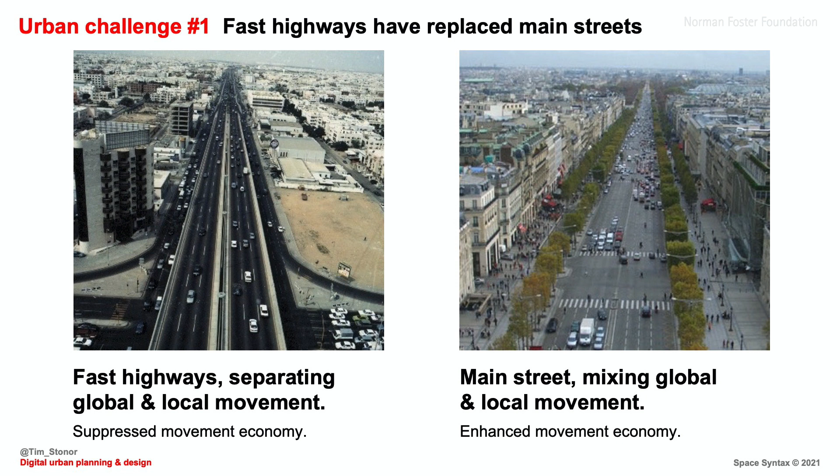Contrast the situation on the left, which is a city in the Middle East, with the city on the right, which is Paris, the Champs-Élysées, which is a main street mixing how you walk and where you drive and where you cycle. The buildings front the Champs-Élysées.

The property values are the highest on the Champs-Élysées. In the city on the left, the buildings turn their back on the highway and the property values are among the lowest in the city.

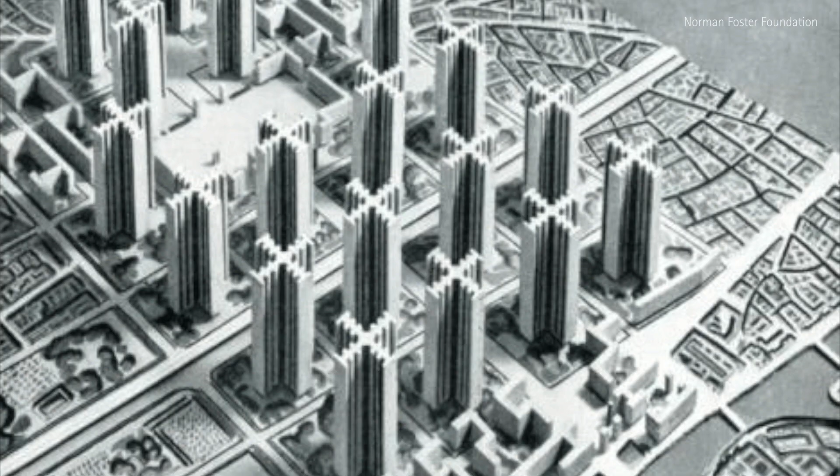Where did this come from? We can trace the origins of this approach to city design, this negative approach, to the Plan Voisin by Le Corbusier. A noble intention to make the city more efficient, but one which separated high-speed cars from slow-speed pedestrians. That plan was sponsored by the Voisin automobile company, and Le Corbusier's own example belongs in the collection at the foundation. A noble idea to use the car to create new forms of mobility, but one that was highly damaging to existing places and to the creation of new places.

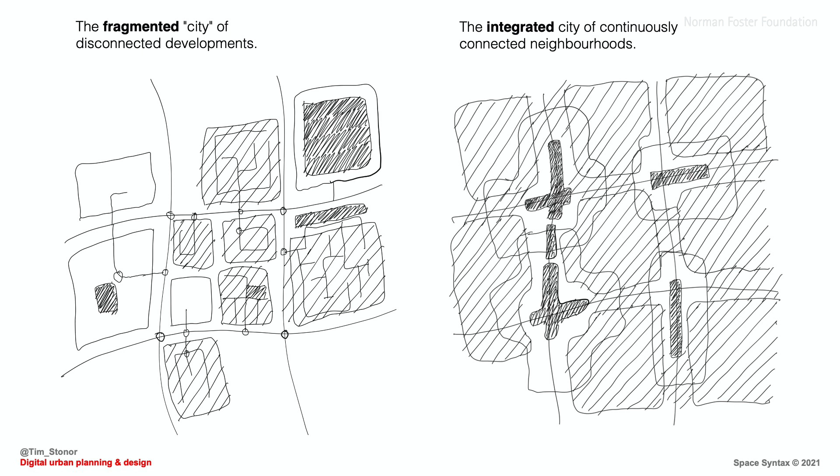So what we can see is the number one challenge: the fragmented city of disconnected developments on the left, or the integrated city of continuously connected neighborhoods on the right. Your choice. Which one would you rather build? Which one would you rather live in? Is it the city of car dependence, obesity, and loneliness, or the city of walking, cycling, and livability?

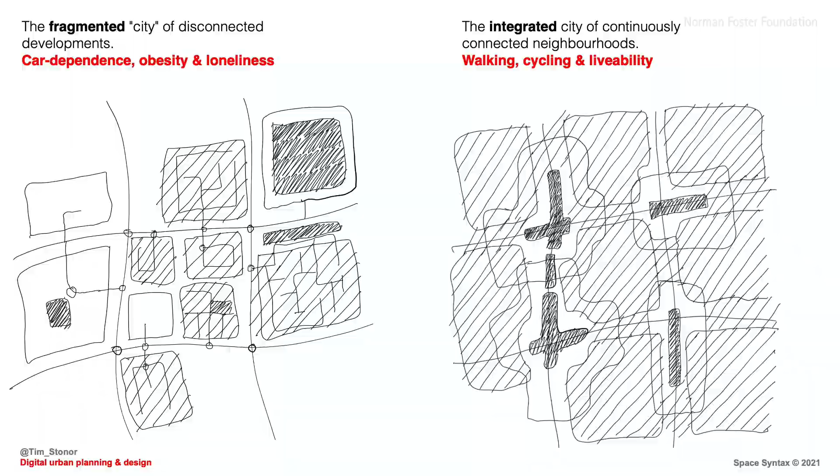Clearly, it's got to be the latter. It's got to be cities like Barcelona, cities like Madrid, cities like Paris, all of which have been built around great places for people to be.

And this isn't just about simple enjoyment. Look closer at how people behave in streets and public spaces, and there is a myriad of activities being undertaken, from simply being present, co-present with other people. Then the beginnings of communication—a wave across the street might lead to an interaction between people that might itself develop into a transaction, perhaps an economic transaction or a social transaction: the creation of a friendship, the creation of a business partnership.

Being introduced to people in public space, at a bar, at a cafe, is a very everyday thing, but put it together globally and you have a process of innovation, a process where those introductions lead to new ideas being created that had never existed before. Ideas that can then be broadcast among the community.

So look at a simple public space, and you're actually seeing what I call the transaction machine. Cities are transaction machines. We have cities for a reason: to help us understand our problems and then find the solutions to those problems. Cities are giant computers, only if we build them right. And if we want to build them right, we have to build great streets and great public spaces to create those places where people can generate those relationships and create those transactions.

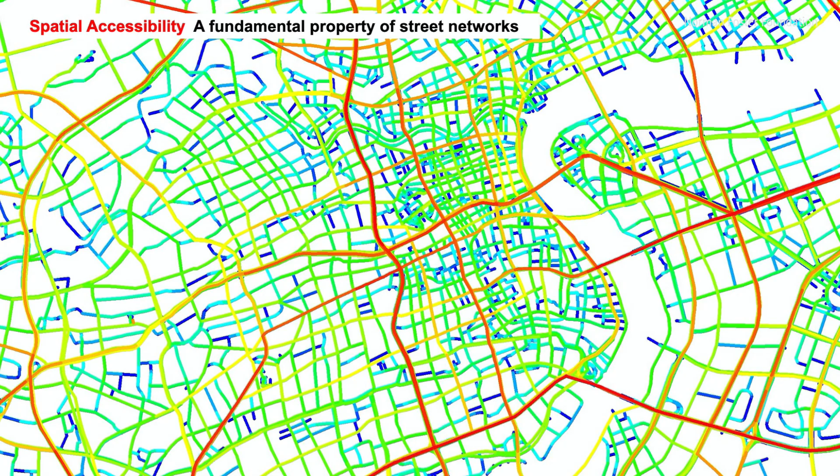We use a highly simple graphic system where the best connected streets are highlighted in red, then orange, yellow, green, through to the least well-connected streets in blue. This property of connectivity is measured by an algorithm that journeys from every street origin to every other street destination and calculates the simplest route from origin to destination, finding not only the shortest route, but the route that involves the least wiggle, the least deviation from a straight line.

We've discovered through research that those two properties, distance and simplicity, explain how most people, most of the time, make decisions about how they journey through cities. Run the algorithm, you can create a value for each street, represent that as a color, and you have a very simple, straightforward, relatively quick and affordable reading of the mobility hierarchy of a city.

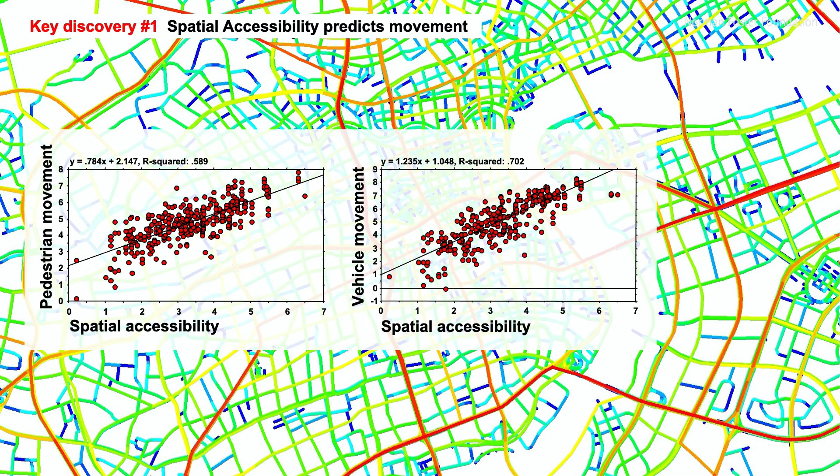And you can see instantly how the city then works, because the research shows us our key discovery number one: that spatial accessibility predicts movement of both pedestrians and vehicles, cycles as well. The more connected streets are the streets that naturally gather more movement to them. We call it natural movement. And that means that these analyses can become design tools.

We can use these tools in the master planning and design process to test design concepts. Indeed, Bill Hillier, Norman Foster, and colleagues worked on a highly influential master plan in the late 1980s at King's Cross in London, using this design tool to test ideas for new connections.

That, if you like, is a golden rule in urban master planning. If you want to generate movement on any particular street, you have to connect it into the wider network in a simple, straightforward, and linear way. Being connected locally is not good enough.

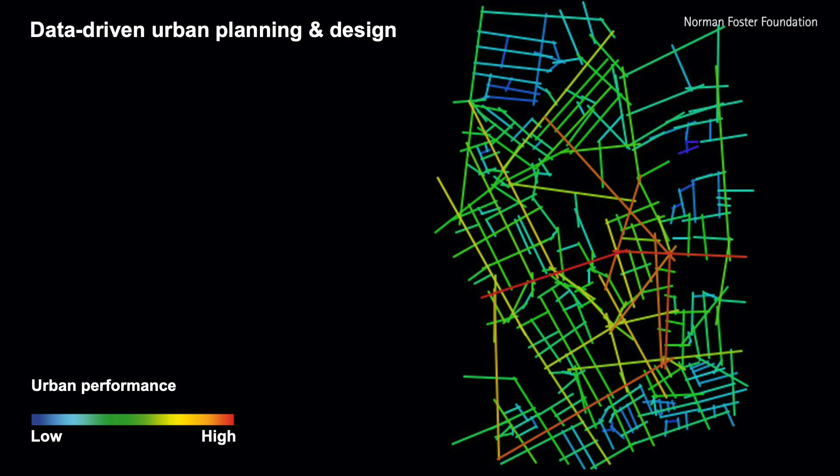Into this we can then place secondary and tertiary streets. This is the beginnings of the thriving life that creates the transaction machine.

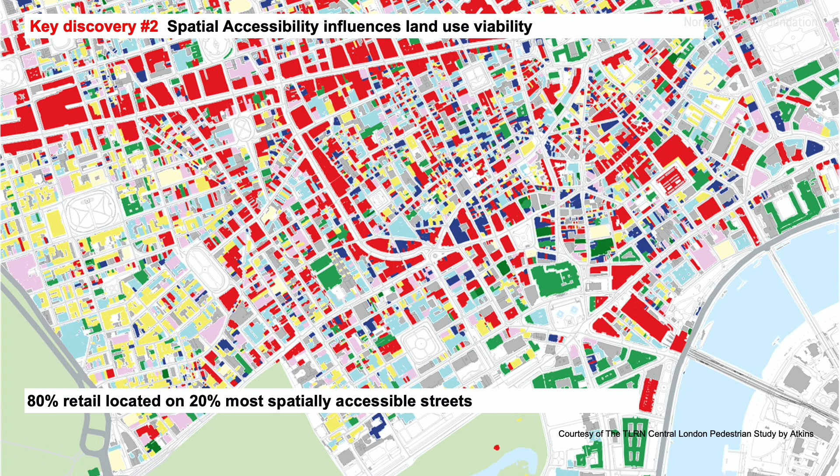80% of London's retail is located on the 20% most spatially accessible streets. This isn't by chance, and it isn't just London. We find this in towns and cities worldwide. We also find it in unplanned settlements.

Left to our own devices, the human species creates connected grids into which land users can then drop the retail on the main streets, the residences in the back streets. It is, if you like, the influence of architects applying unproven theories which seems to have messed this up in the 20th century and created so many of the problems that we've now inherited.

Now, by putting these findings together, spatial accessibility influencing movement and spatial accessibility influencing land use, we have a form of integrated urban modeling that I'm now going to show you some examples of, in use in practice on master planning projects worldwide. Integrated urban models are becoming, and my prediction is will become, the main tool of urban master planning in the decades to come, because they give us this data-driven understanding of whether our planning proposals are likely to work.

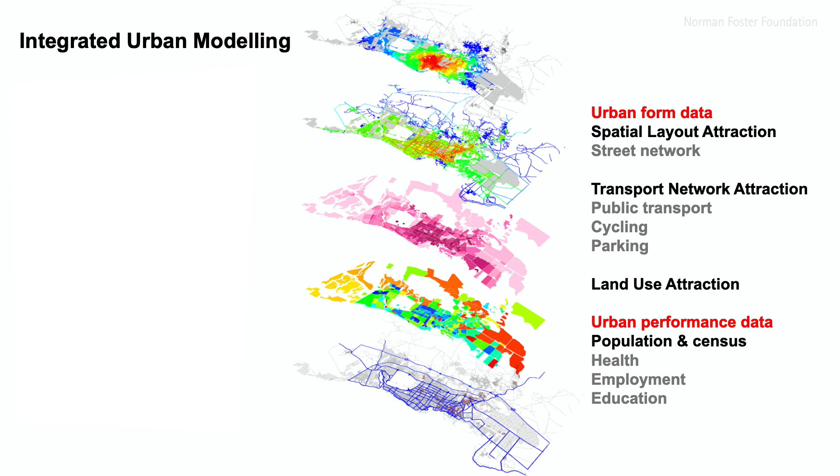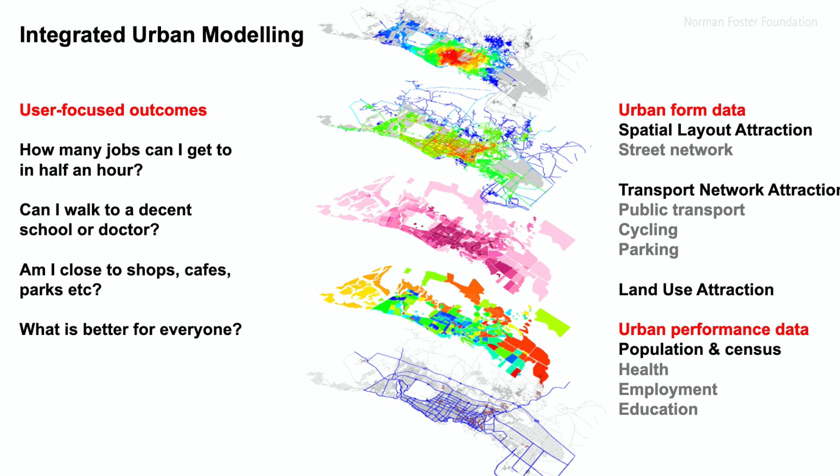They also address everyday questions. They address user-focused outcomes. How many jobs could I reach in, say, half an hour of where I am? Can I walk to a health center, a doctor? And are they a decent doctor, based on data sets that might describe their performance? Am I close to shops? And in thinking, as the master planning process requires us to think, about how everything works together, what's best for everyone?

Let's just add a few more discoveries before we move into the case studies. A third key discovery is that spatial accessibility influences crime and safety.

No one understands space better than criminals who exploit it. Burglars, housebreakers in particular, exploit the disconnected, quiet streets, where we find, from police records and police data, more incidences of crime. A fourth key discovery: spatial accessibility influences land value.

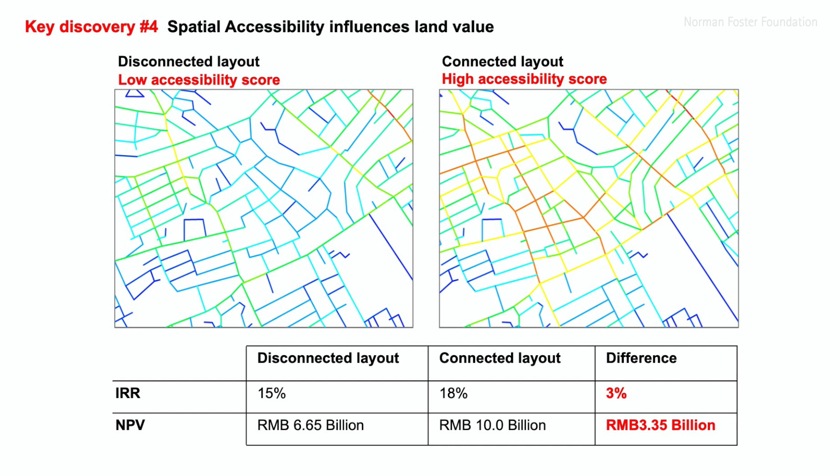We're seeing more and more very good data from cities worldwide that spatial accessibility fundamentally influences the value of land, to the degree that we can build forecast models that don't just talk about the movement likely to take place in streets, but the long-term urban value likely to be generated by having the benefit of that connectivity and activity.

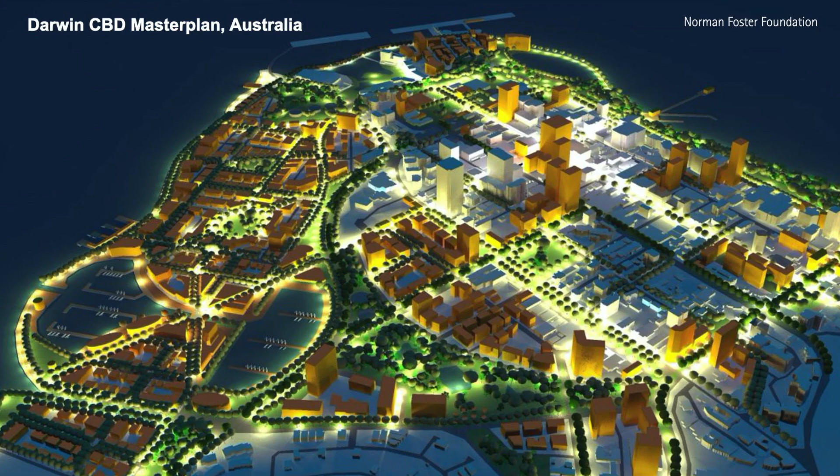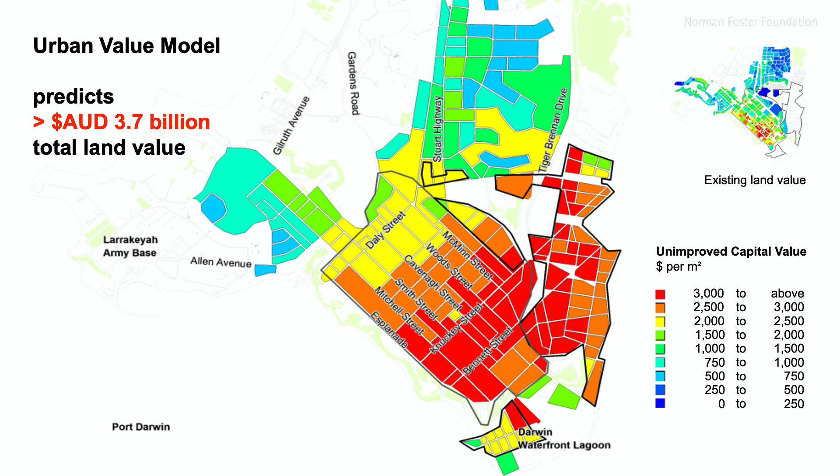So, for example, in our master plan for the city of Darwin in Australia, which we developed with Design Urban, we created a vision for the city built around streets and public spaces that was then supported by rigorous analysis of the underlying urban values being created, so much so that we could demonstrate that the master plan would generate 3.7 billion Australian dollars of land value, not just on the site itself, but in the surrounding area that would also benefit from the increased connectivity.

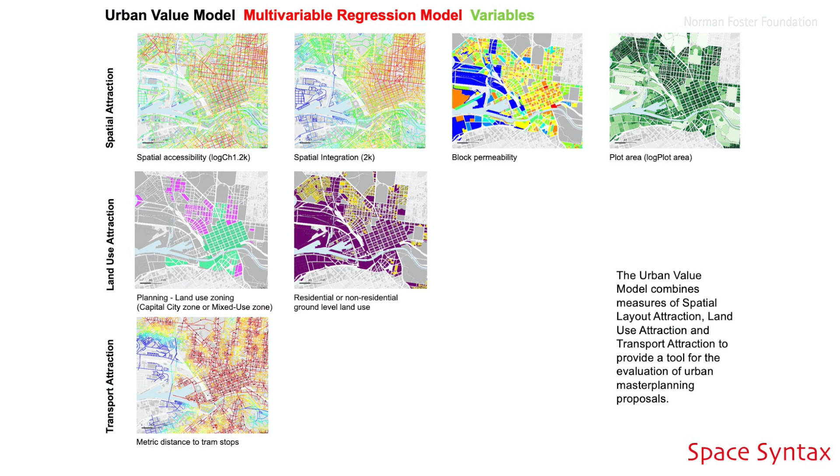Development has a ripple effect, either a bad ripple effect or a good ripple effect. Spatial modeling allows us to predict which one it's going to be. And as we learn more about these tools, we're adding more variables into our multivariable regression models, for example access to public transport, and the degree to which land uses are mixed.

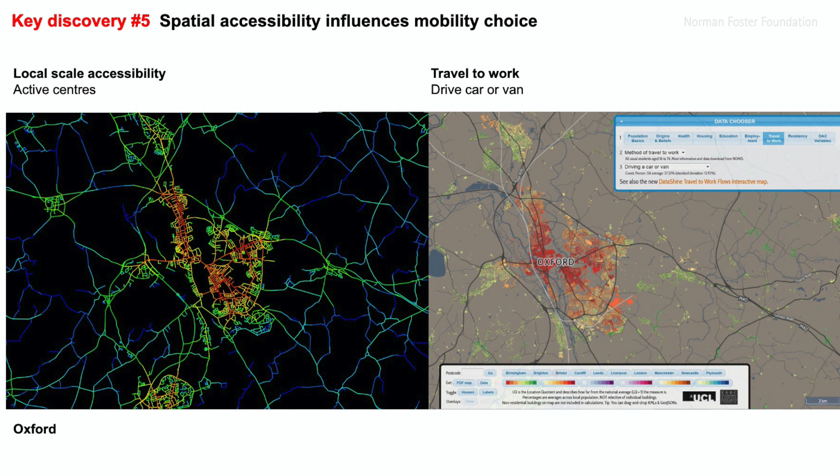People walk more in red where the streets are more highly connected. This then has a health influence. Spatial accessibility influences physical health outcomes. More spatially accessible places, generating more walking, have higher health outcomes.

What's interesting with health is that these are not just physical health outcomes but mental health outcomes. The negative consequences of disconnected, low density, isolated planning is loneliness—people not having local neighbors, or enough of them, to generate social networks, and feeling lonely as a result.

So at Space Syntax, in summary, what we're doing is bringing together geospatial data sets and investigating the relationships between how the city is connected together as a network of space, how that influences mobility, and how that then has social, economic, societal and health outcomes.

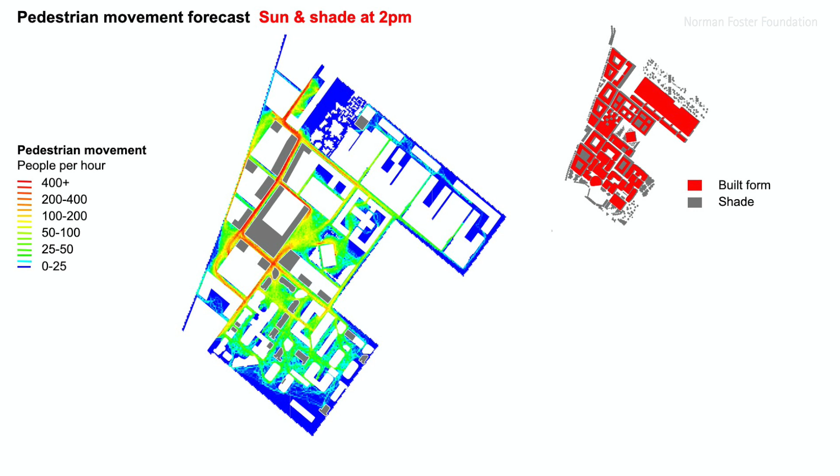And of course, it's not just the connectivity of space that matters—it's other influences, such as here working with Foster and Partners in Masdar, looking at the influence of the sun. You might have a beautifully connected street, but if it's in full sun in the early afternoon, people are going to avoid it. So you have to mix the data sets together.

Our interest, as well as working on master planning projects, is to develop the technologies behind them to create digital urban platforms that can then be used for a series of operational outcomes, be that transport planning or health and well-being planning. These platforms become the mediation between those drivers, those impacts, the opportunities and technologies we saw at the beginning, and the ultimate applications needed to make the change happen that's required.

Those applications involve the necessary process of decision-taking, community engagement, having people on your side because you can explain to them why you're doing what you're doing, having an intelligent conversation that generates trust. These are also big issues for our profession.

We've created, as a profession, a lot of failure, we have to admit. Being able to then address that and demonstrate the transparency of processes that are proven to work is for us a key driver to the fundamental mission: to develop these technologies, apply them, and then disseminate them, which we've been doing on many projects now over the years.

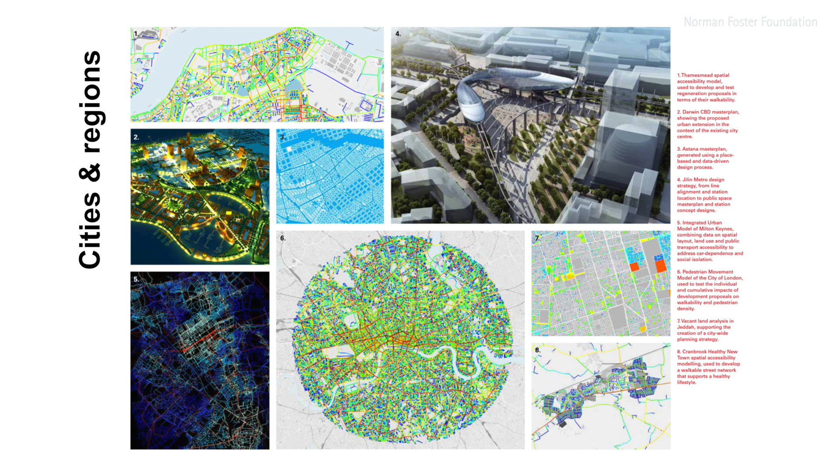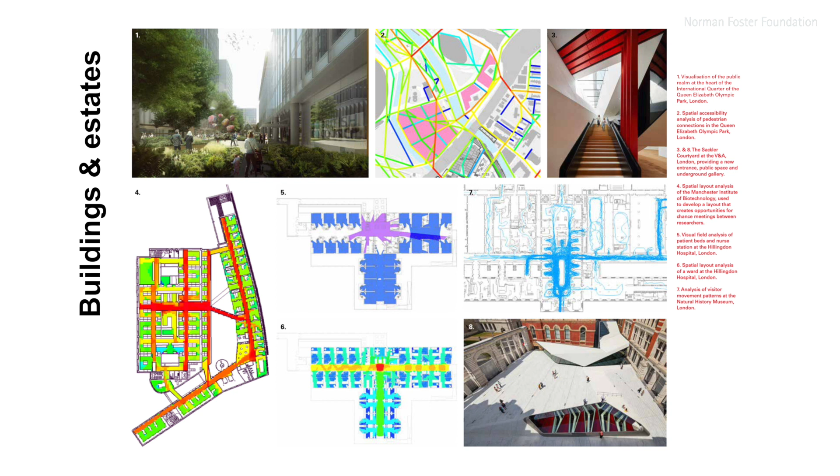We've been able to build, go back, test, improve and evolve these processes across cities and regions, at the finer scale of individual property developments, and then inside buildings themselves, to show through actual built change that these techniques work. And if they don't work, we improve them to make them work better.

Whether that's in the Tate Gallery, the British Museum, or a rapidly growing city in China—one of the big challenges for development today is that development is happening so quickly. How can we use computation to get ahead of the very rapid processes of change and lock in a sustainable plan early in the process to then guide that change?

Another key application is in unplanned settlements, where we see so much of the global population living in slums, unplanned and informal settlements. We've been able to, here in Jeddah in Saudi Arabia, identify the high levels of walkability of those informal settlements. And although the building quality is poor, as part of our master planning activity, we say let's not lose the walkability as we increase and improve the quality of construction.

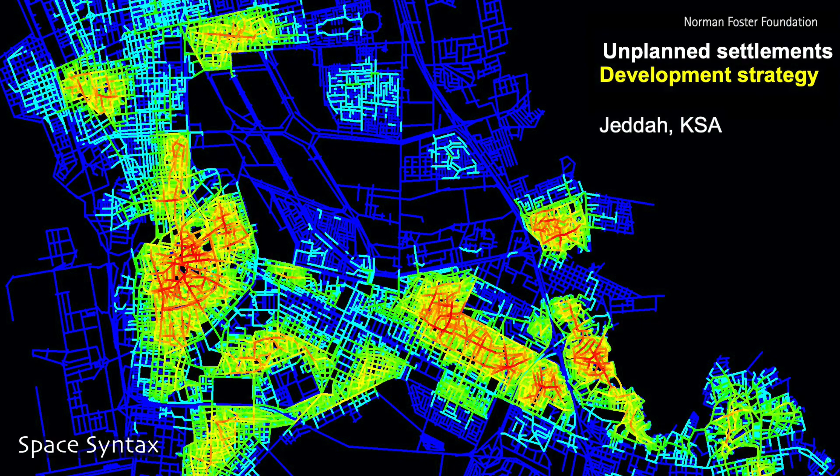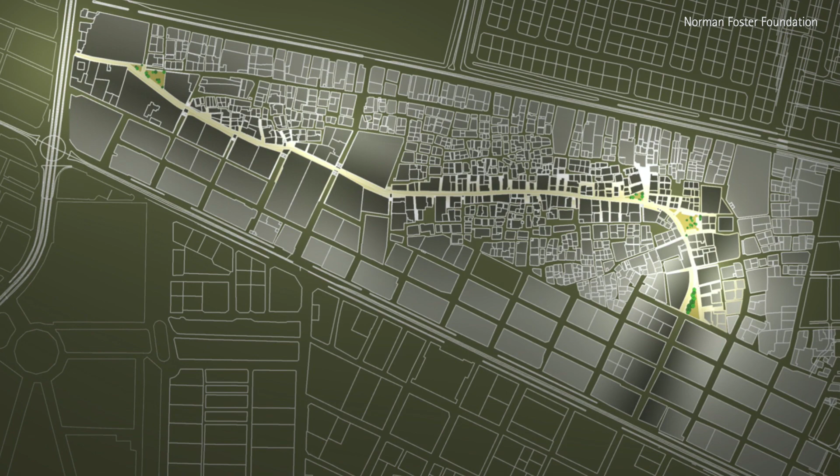So the model's been used to take the connected, walkable heart of the unplanned settlements and grow them out into the wider network of vehicle-dominated streets where the wealthier population are moving, trying to bring those two communities of mobility together—connecting the central streets of the unplanned settlement to slow down the external fast-moving highways, turning the highways into boulevards and letting the two communities trade off each other. That's the essence, in this case, of these master plans.

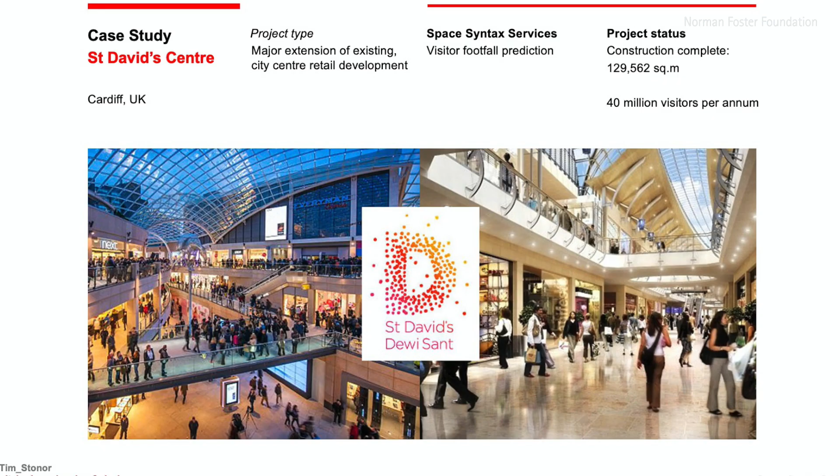Retail is such an important and fundamental aspect of human existence, the way we buy and sell, that we've seen many applications of these technologies on high profile, large scale retail developments. In that, we've been able to influence the fundamental concept around shopping malls—turning them outside, connecting them to the city, connecting retail back to where it belongs, which is an urban experience, and working against the prevailing thinking, which was to over-internalize, lock in people and make it difficult for them to find their way out of these retail centers.

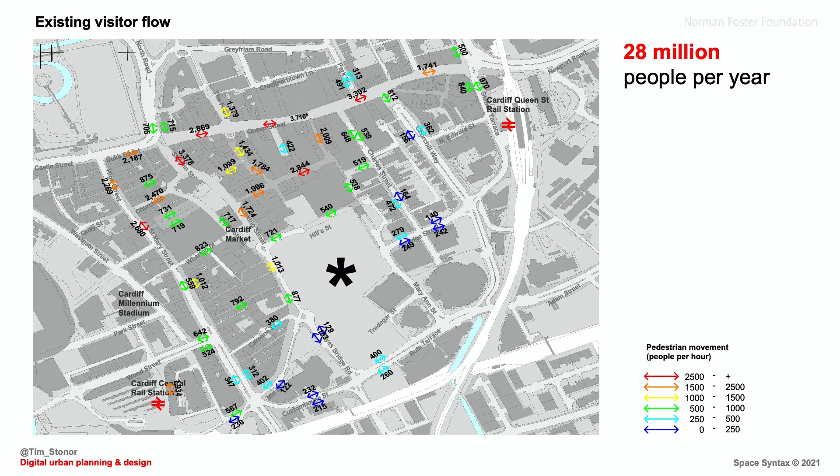We're urbanizing the process of retail in centers where we've been able, through surveys, through modeling, and then through forecasting, to predict the ultimate movement flows through.

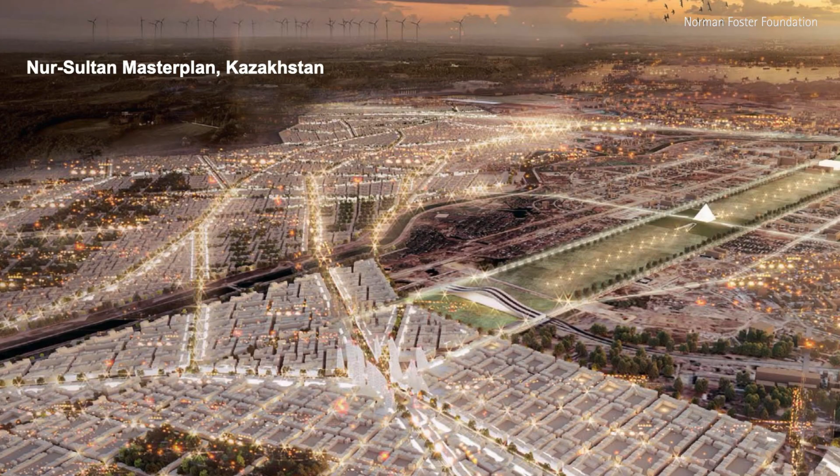I'm going to finish with one final case study, a recent case study from the country of Kazakhstan, where Space Syntax won the international competition to master plan the future of the city.

In doing so, we addressed the headline objective of the city, which was to grow but also to improve and intensify its existing neighborhoods, to move away from the car towards public transport, but also to improve the walkability and cyclability of a city which has environmental challenges: very hot in the summer, very cold in the winter, a very strong wind that blows through all year round.

Our response, as you can see, is built around boulevards and streets and public spaces, which can modify the climate and also create those conditions that encourage walking and cycling, create the density that makes public transport economically viable. As I run through this sequence of slides, I'm showing you our competition entry to begin with.

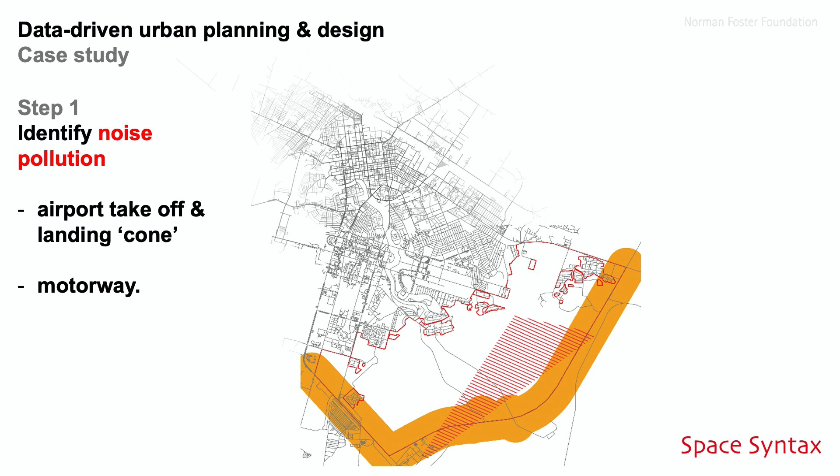In terms of expanding the city, growing it, we identified the best direction of growth was towards the south and east. We start with the noise pollution, identifying noise from the motorway, identifying noise from the takeoff and landing cone of the airport, and saying let's try to avoid those in terms of where we place new development.

Identifying flood risk, and again, those parts of the land that are more likely to flood become places where we try to move development away from.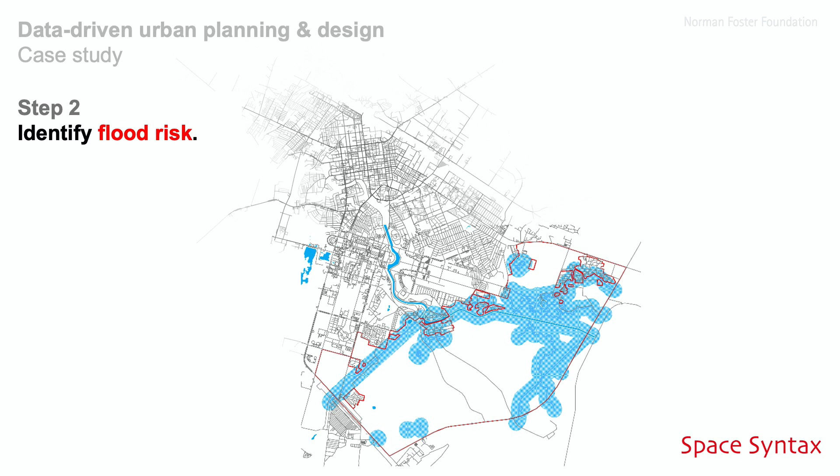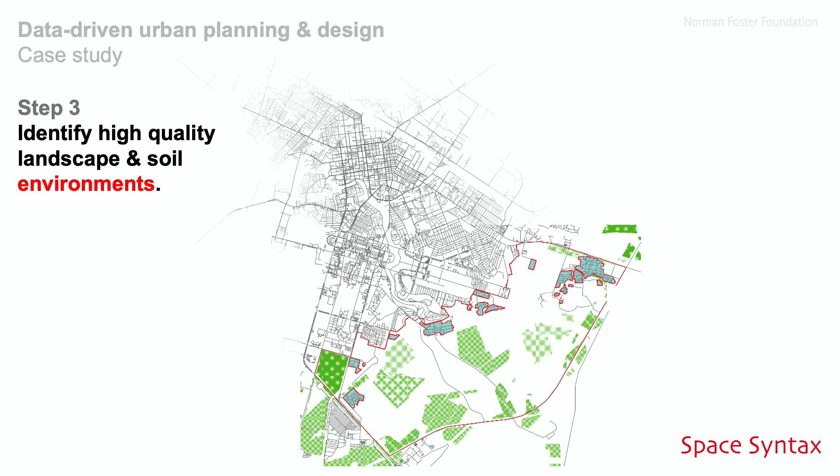Then the areas of sensitive landscape, where we have high quality soil and places, trees that have been planted that we don't want to have to cut down in order to build new buildings. We want to grow around and incorporate into our new city.

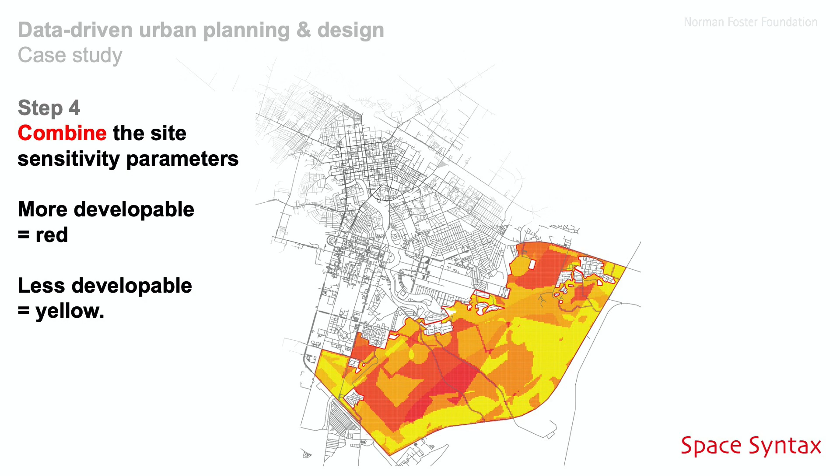Put those together and we have site sensitivity parameters, which create more developable land in red, less developable land in yellow. We then trained an algorithm to run from a set of gateways between the existing city and the new development area.

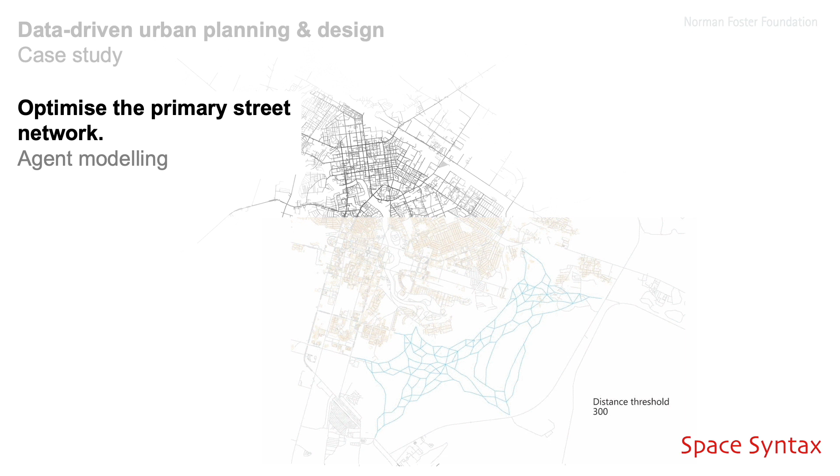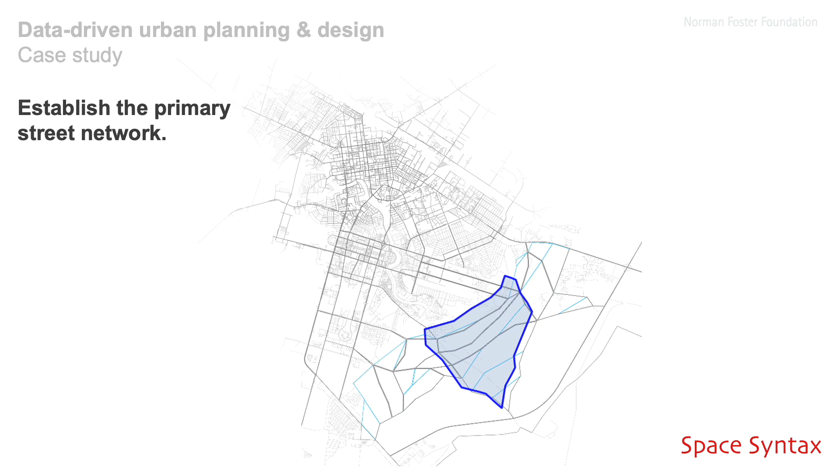That found the natural lines of movement, back to what I mentioned earlier, the shortest and least complicated lines of movement between the gateways, to establish the foreground street network of the city, main streets, the main boulevards around which the neighborhoods would be created.

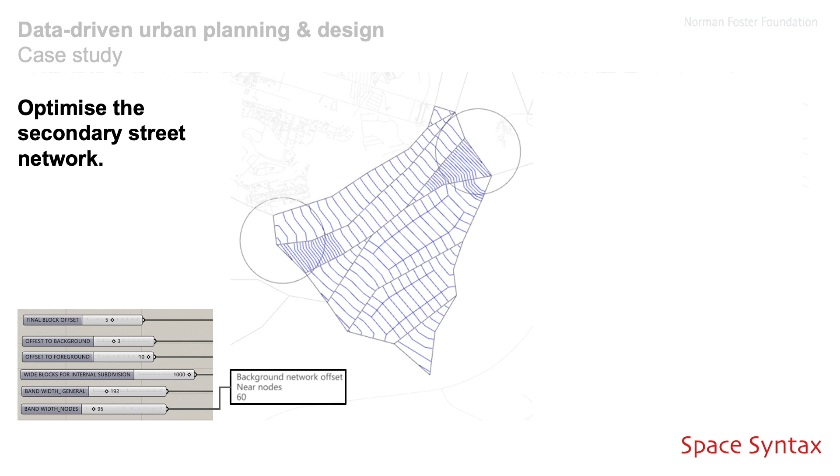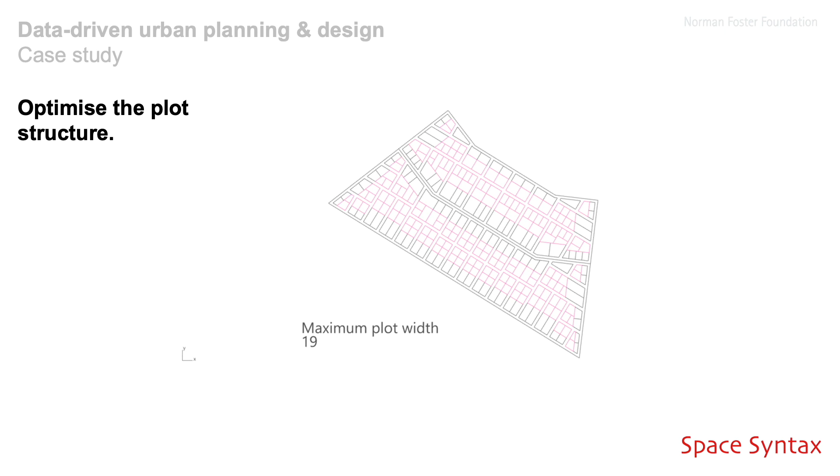Zooming in, we ran optimizing algorithms to identify the secondary and then the tertiary networks of streets. At each stage, you can change the density settings, the floor area ratio, the plot width, the plot depth settings in order to train the algorithm to create different levels of option.

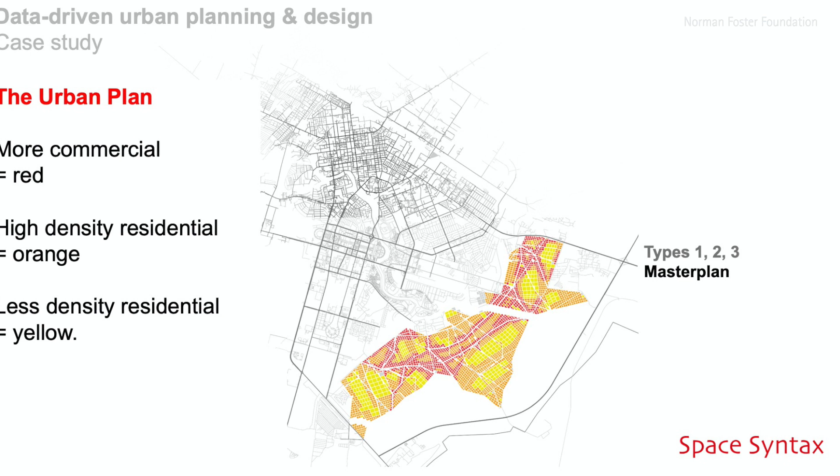In the end, we've developed a typology of building forms: more commercial, taller, denser, deeper blocks in red, then high density residential in orange, and lower density villa residential in yellow. This has all emerged by growing a city.

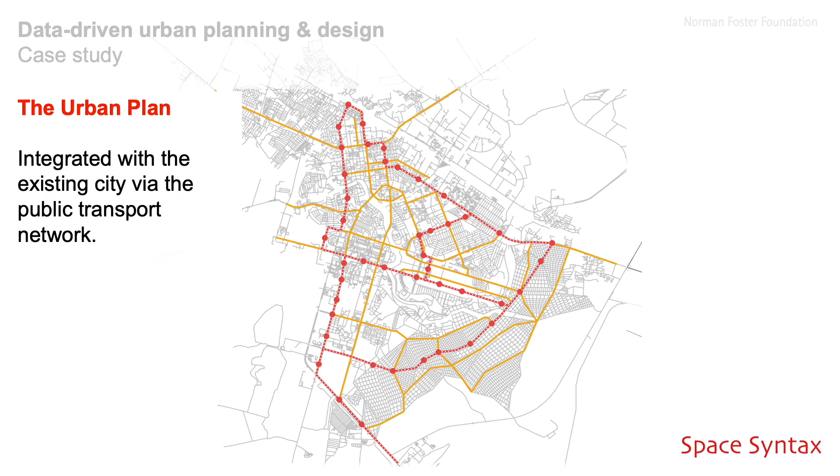We're very excited about this process, using algorithms to make designs—not because it removes responsibility as architects from the ultimate design, but rather because if we're going to make the change that's required globally, we need to be able to create plans in places where there are no architects.

Going back to where I started with the drivers, those opportunities, if we look geographically at the planet, the places in which urbanization is happening at the fastest pace are those places where the professions of architecture, planning, engineering are least established. For me, a computational approach, a digital urban planning and design approach, is not just a luxury, but it should be a necessity.

That's what's driving our mission at Space Syntax. How can we improve these tools to make them as automated as possible? How can you take a satellite photograph and build a city from the kinds of soil, topography, water data that can come back from the satellite analysis, and avoid having to go through the expensive, complicated processes that are typically the case when you're making a planning proposal in a developed economy?

So to end, I'll leave you with two or three things. First of all, a film to show how in the existing part of Nur Sultan, Kazakhstan, the existing neighborhood here called Technopark can be automated in terms of the processes I've described: spatial connectivity, leading to land use allocation, leading to building massing, growth—all automated in a design process.